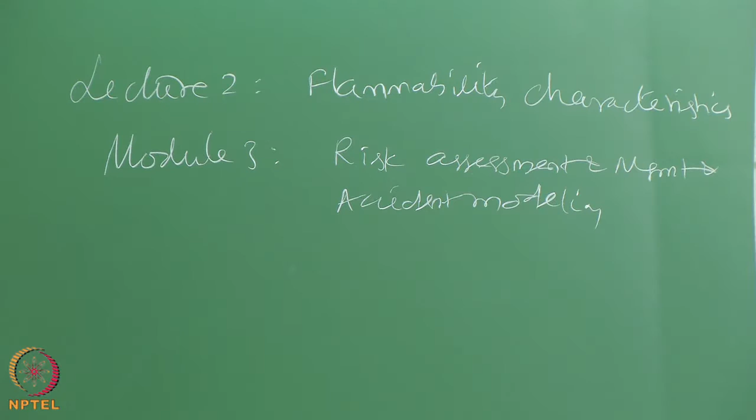We already said a few characteristics are important for understanding the flammability characteristics better. One is what we call auto ignition temperature. The other is what is called the flammability limits.

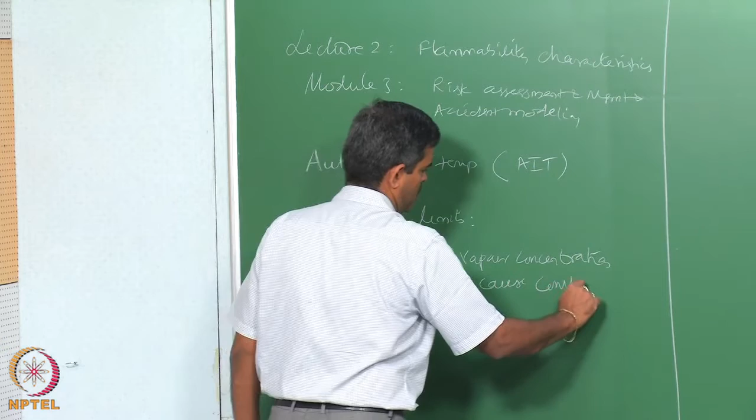Let us talk about the flammability characteristics in detail, in which the foremost thing is the flammability limit. Flammability limit actually is a range of vapor concentration. It is a range which could cause combustion in the presence of an ignition source.

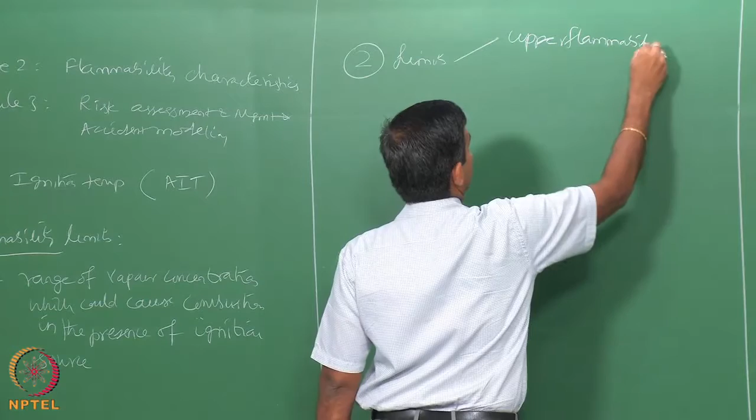Essentially, there are two limits. One is what we call upper flammability limit, which is UFL. Other is lower flammability limit, which is LFL.

LFL actually is a limit below which the mixture will not burn. What could be the reason for this? The reason is the mixture is too lean, so it cannot cause ignition.

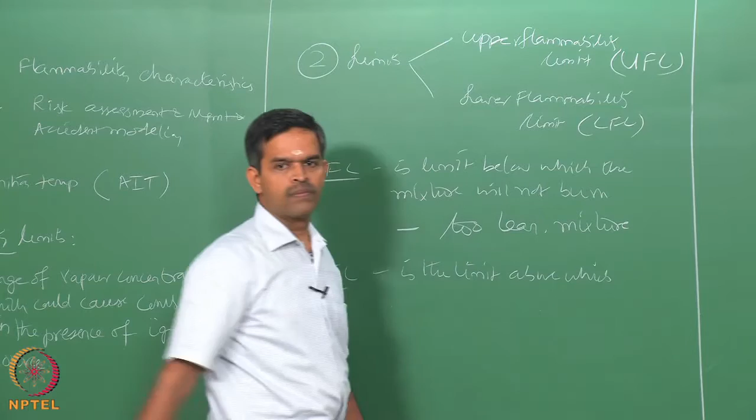Upper flammability limit is the limit above which the mixture will not catch fire. The reason is the mixture is too rich.

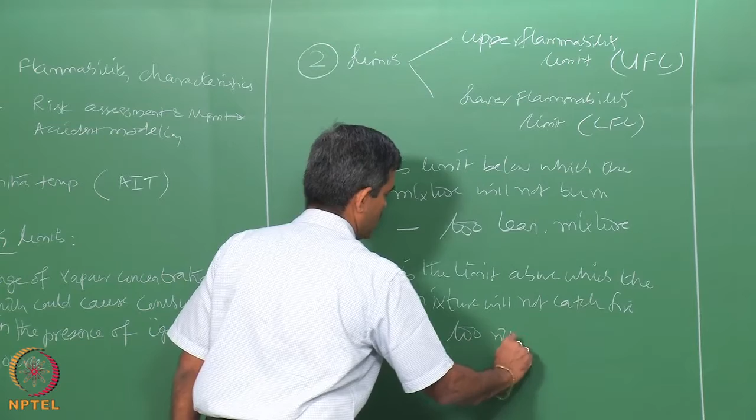So, essentially flammability limits is actually the range between UFL and LFL, because it is that region between which a mixture can catch fire.

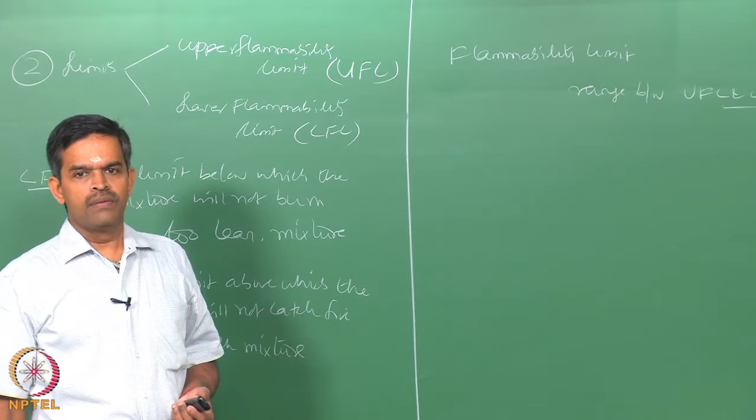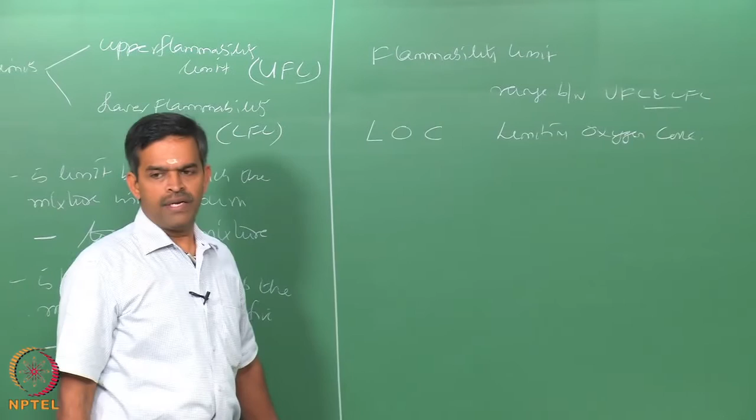The next property could be, interestingly, limiting oxygen concentration. It is the minimum oxygen concentration, defined as the minimum oxygen concentration below which combustion is not possible. To activate combustion, you actually need a minimum O2 presence.

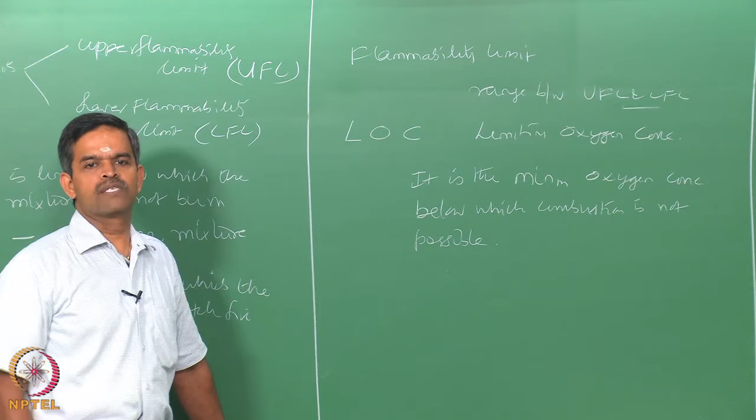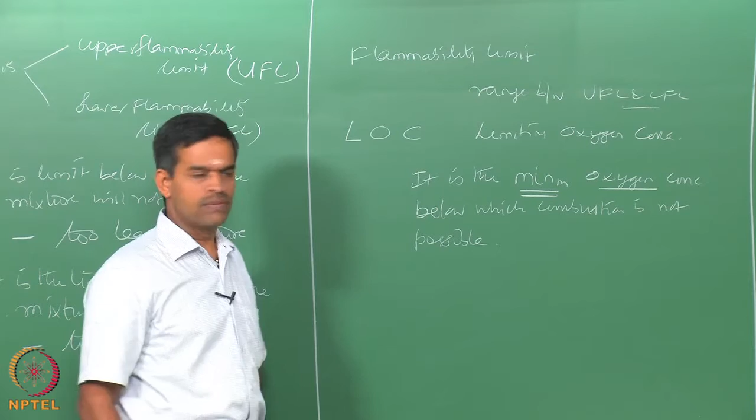If the oxygen concentration is below a minimum required value, the mixture may not catch fire even in the presence of an ignition source. Generally, this is expressed as volume percentage of oxygen.

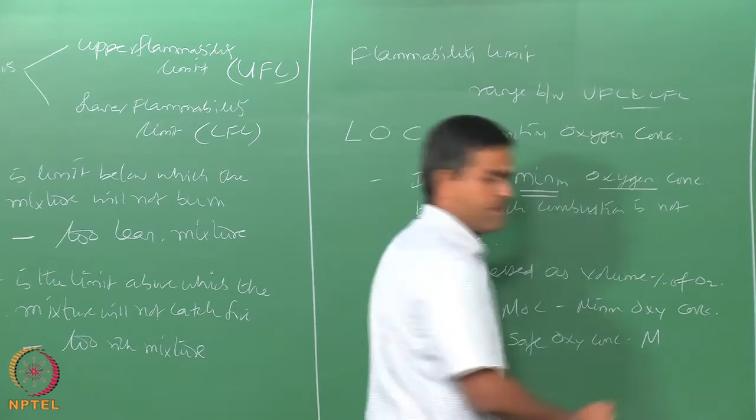Sometimes it is also called MOC, that is minimum oxygen concentration. It is also sometimes called maximum safe oxygen concentration, which is MSOC. So, LOC can be referred as MOC or MSOC. It is actually the minimum oxygen concentration required for a mixture to catch fire.

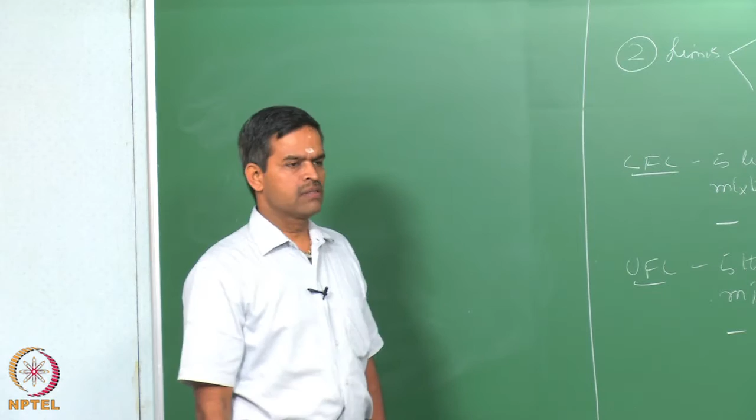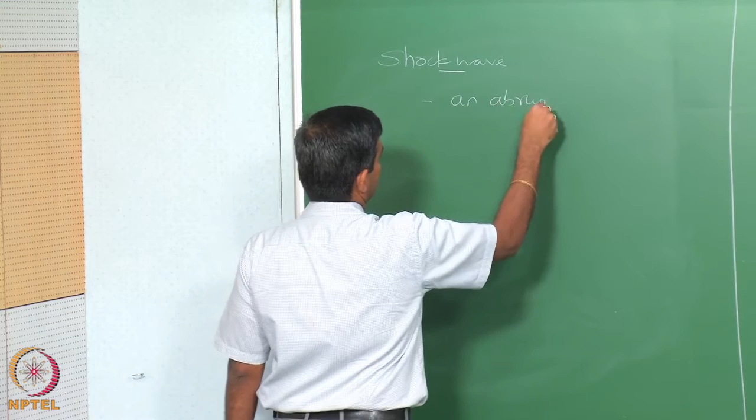As we said earlier, the important consequence or effect of an explosion release is it can result in a shock wave. Let us see what is called a shock wave. A shock wave actually is an outcome of an abrupt pressure wave moving through a medium.

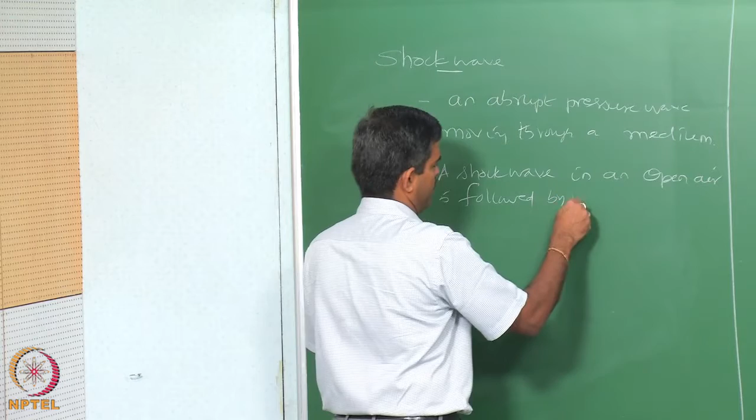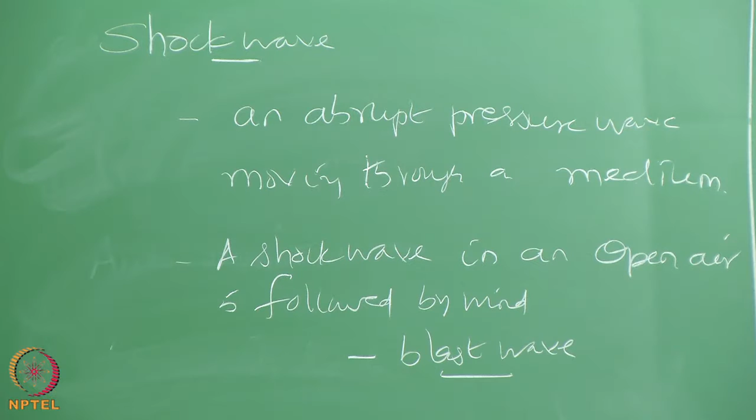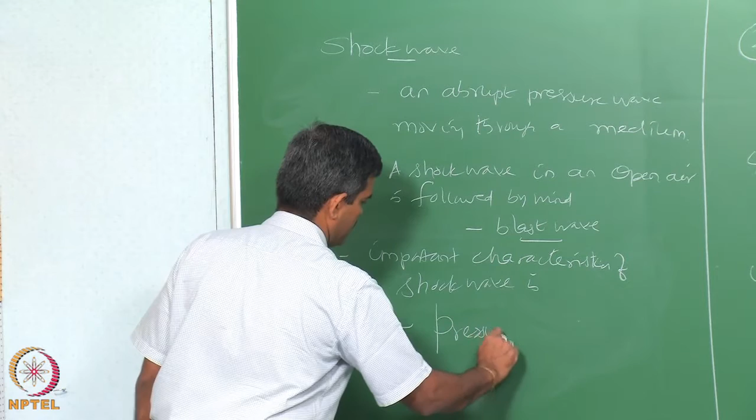One of the important vital characteristics of a shock wave is that the pressure increase in a shock wave is so rapid that the process is almost adiabatic.

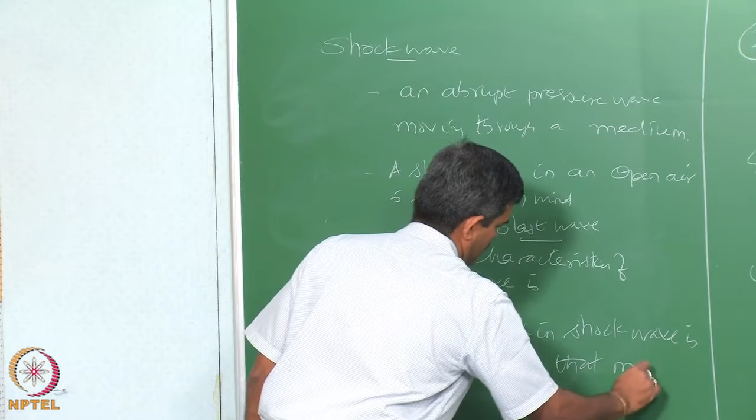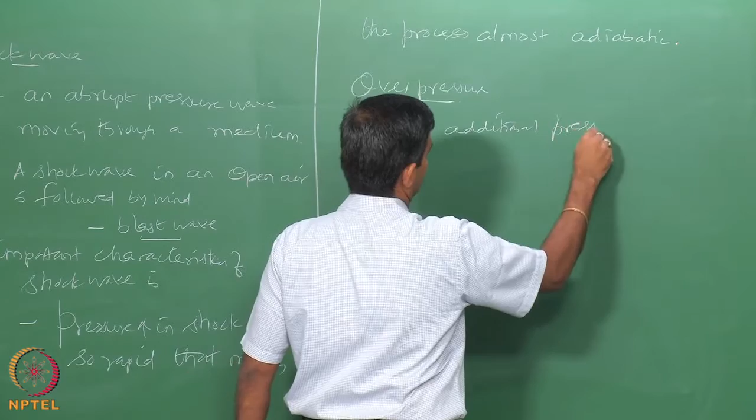There is another important consequence which comes from explosion, what we call overpressure. Overpressure is nothing but an additional pressure imparted on an object by a shock wave.

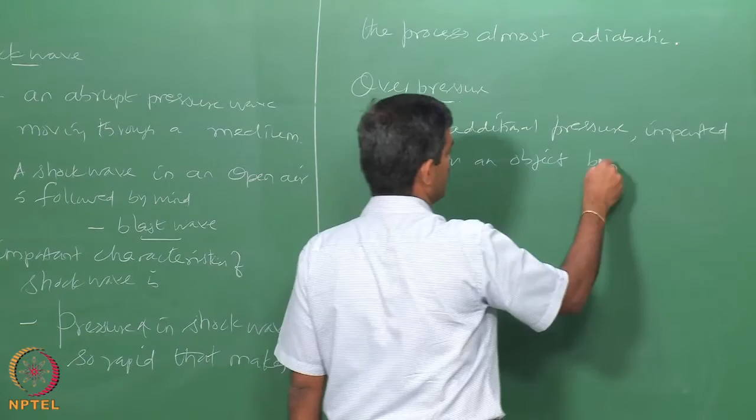Interestingly, as the temperature increases, the upper flammability limit keeps on increasing and the lower flammability limit keeps on decreasing from the original value, and that increases the range of flammability, because flammability is actually the range within which it can catch fire. As the temperature increases, you will obviously see the range of a mixture which can catch fire is widened or increased.

However, the gas or liquid will remain non-flammable above the upper flammable limit and again non-flammable below the lower flammability limit. It is at that temperature which auto ignition is required, meaning the mixture will not require any external ignition source to catch fire. So, it is that temperature which is indicated as auto ignition, which completely lies within the flammable limits of any given mixture.

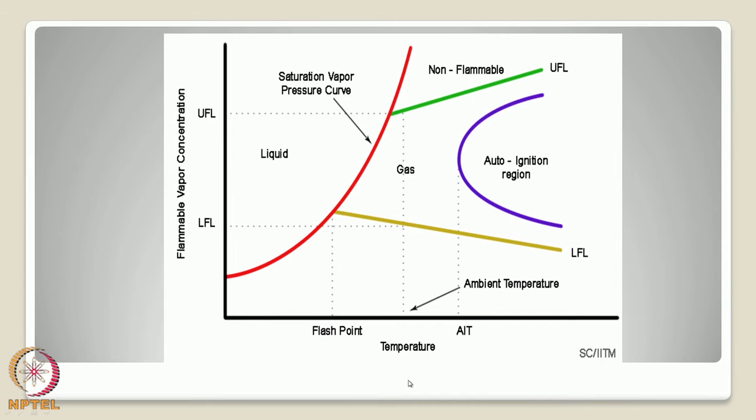We have also seen the flash point, which is an important flammable characteristic of any given mixture, now put together in all terms in a single graph, as you can see from the curve. Let us talk about flammability of liquids, the characteristics of liquids.

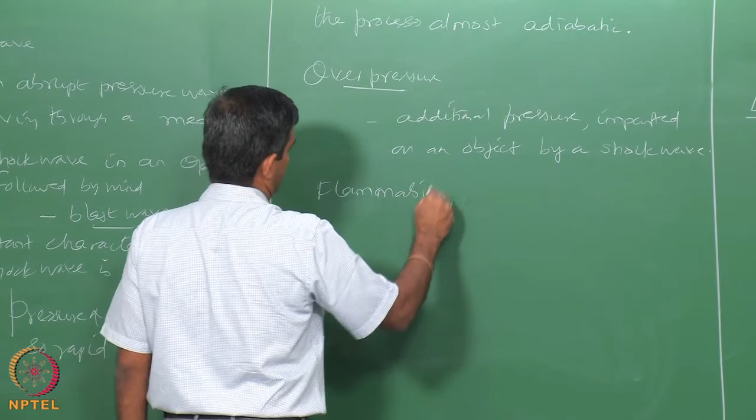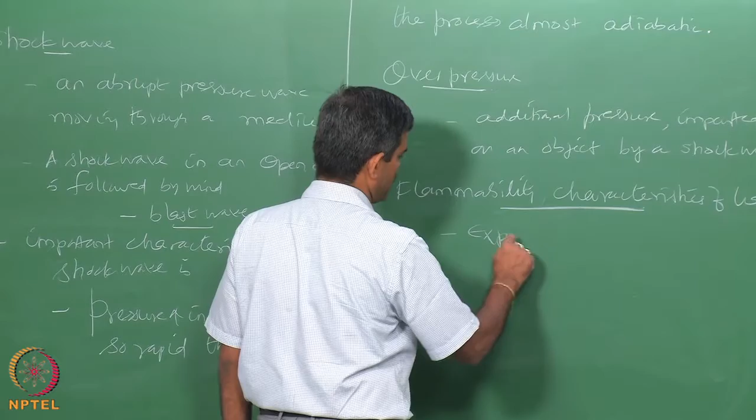The flammability characteristics of liquid are experimentally determined by a setup called open cup method. They are generally determined experimentally by open cup method. However, the flammability characteristic of liquid can also be expressed using an analytical relationship, which I will write now.

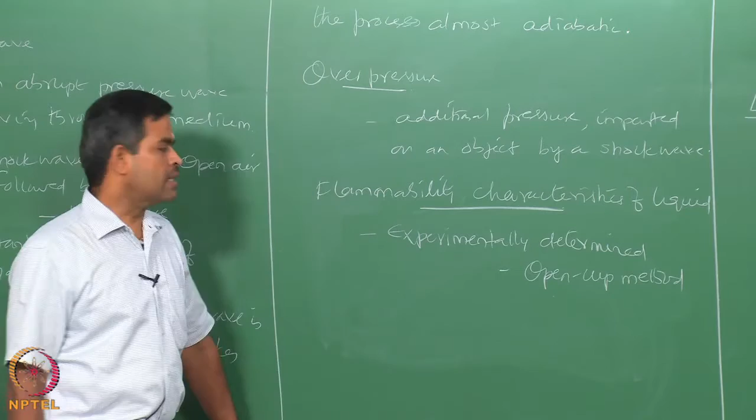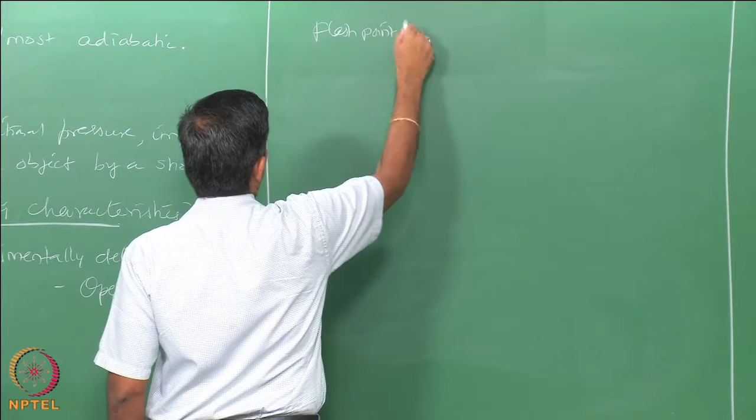If you know the constants A, B and C, the flash point temperature Tf can be computed for a given liquid, for any liquid, if the boiling point is known.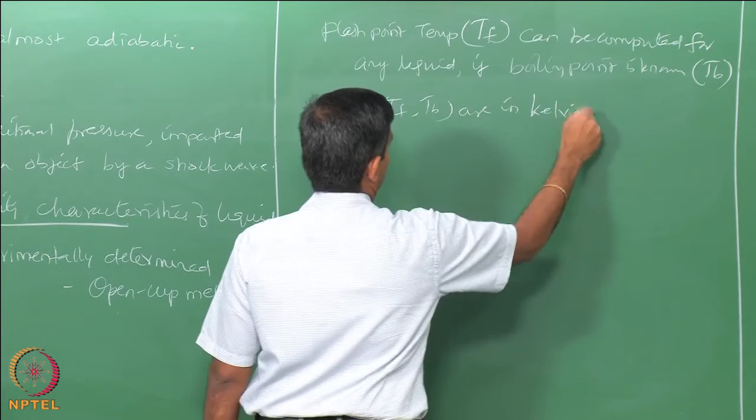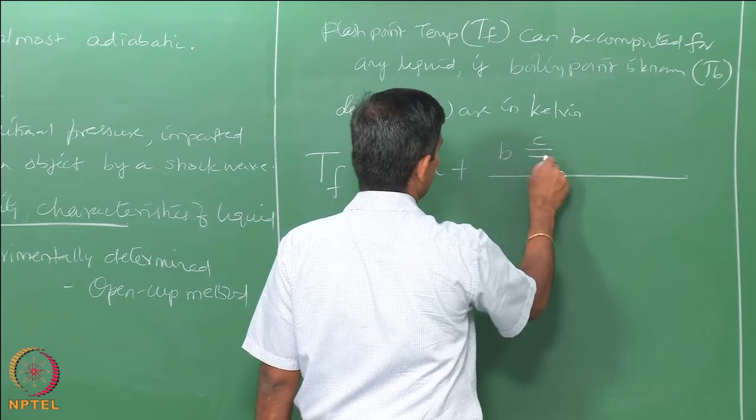Let us say both the temperatures are in kelvins, then flash point temperature of a liquid is simply given by A plus B into C by Tb, the boiling point, exponential to the power of minus C by Tb, divided by 1 minus exponential to the power of minus C by Tb, the whole square - equation 1.

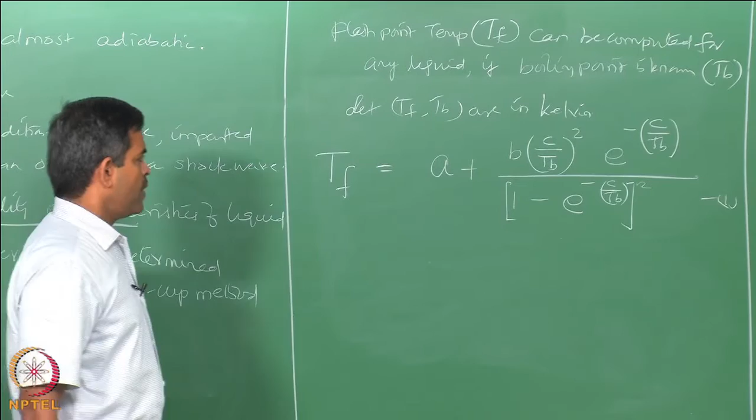If I know the boiling point of the liquid, I can easily estimate the flash point if I know the constants A, B and C in this empirical equation. So, for different chemicals, these constants A, B and C, which are used to estimate the flammability characteristic of a given liquid, can be easily found in the literature.

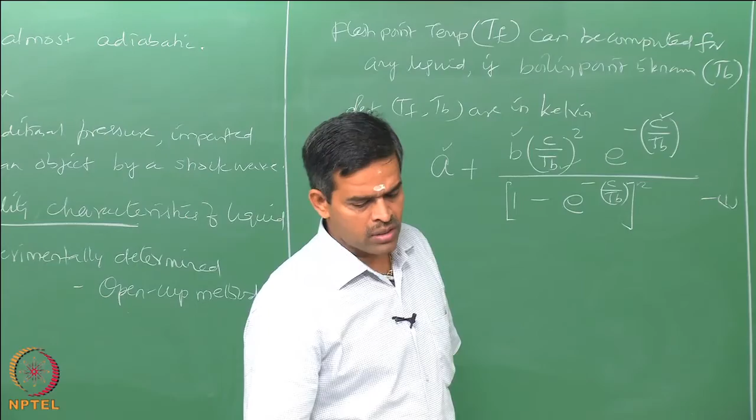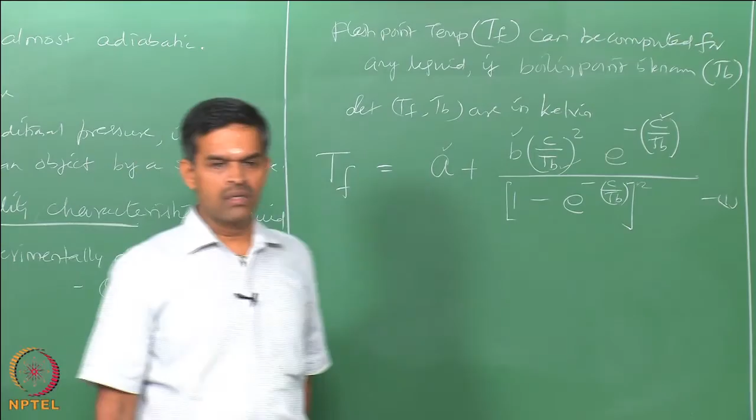So the constants A, B and C are available. Substituting them and knowing the boiling point temperature of the liquid in Kelvin, one can find the flash point temperature of the liquid in Kelvin again, and once you know the flash point, one can easily find the upper and lower flammability limits or characteristics using the open cup method, which can be easily estimated.

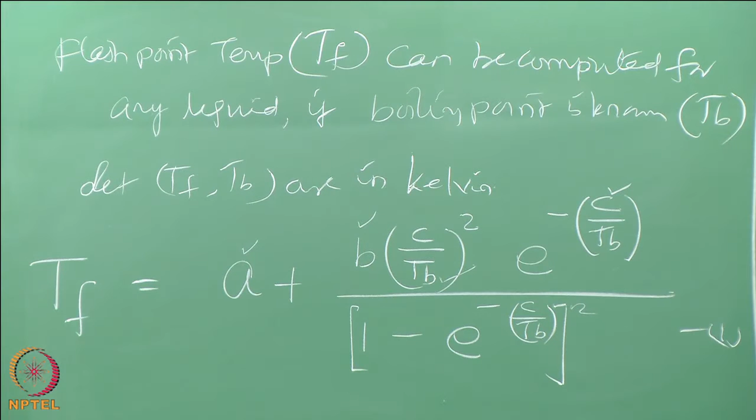Let us talk about flammability characteristics of vapor and gases.

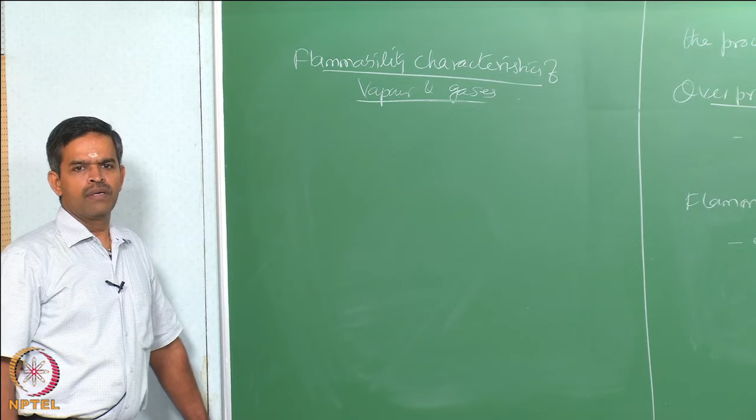The flammability limits of vapor can also be experimentally determined in a closed vessel apparatus. So, they can be experimentally determined using a closed vessel apparatus.

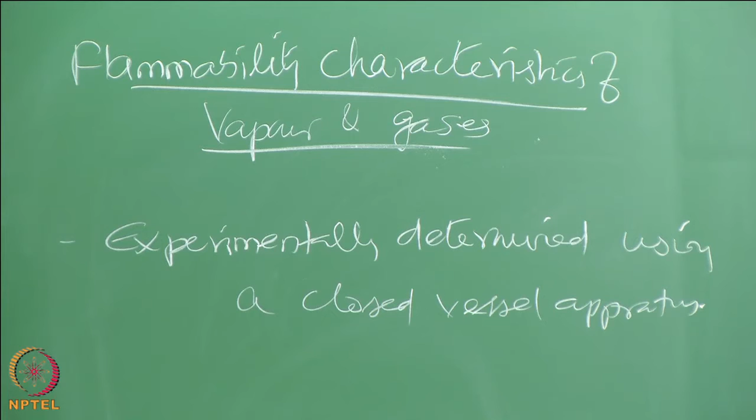Alternatively, one can also find the flammability limits of a mixture of gas and vapor using the Le Chatelier relationship.

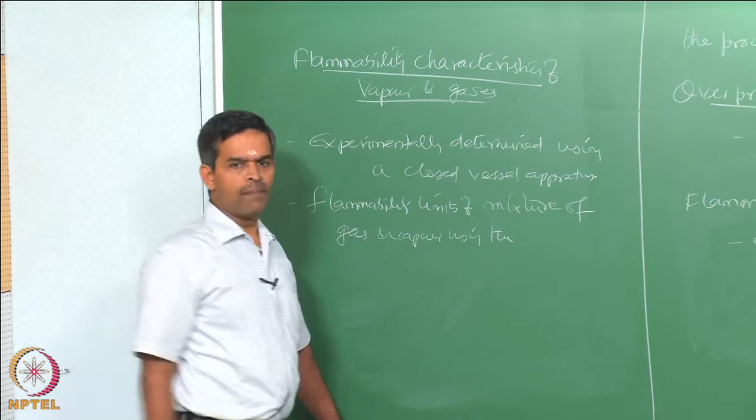The lower flammability limit of the mixture of vapor and gas can be simply given by 1 by sum of yi by LFL of i, and i is the sum here - equation number 2.

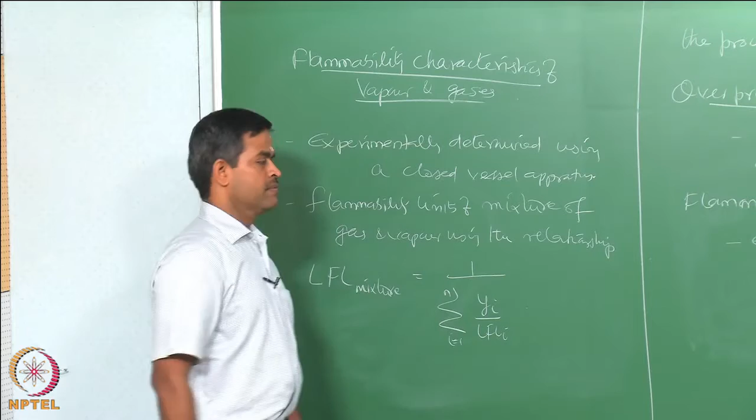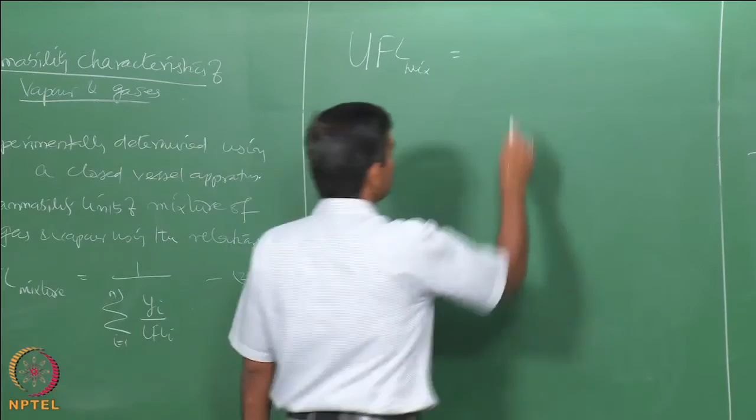Upper flammability limit of the mixture can again be given by the same equation, of course substituted with yi by UFL of i, varying from 1 to n, where n is the number of gases or vapors considered for the analysis.

So LFL i is the lower flammability limit of the ith component in the mixture, in terms of volume percentage. yi is actually the mole fraction of the ith component on a combustible basis. n is the number of combustible species considered for the summation.

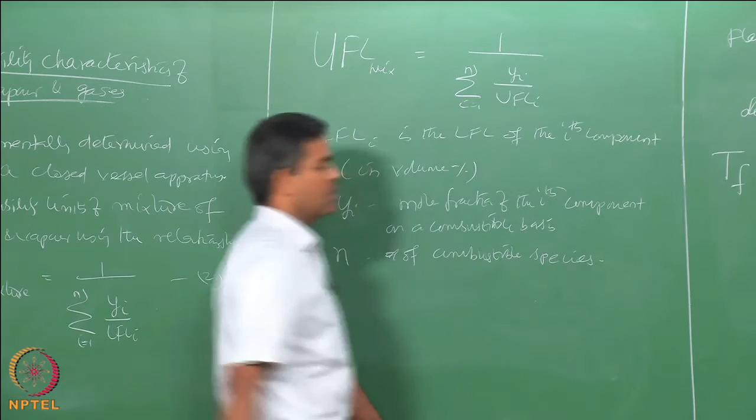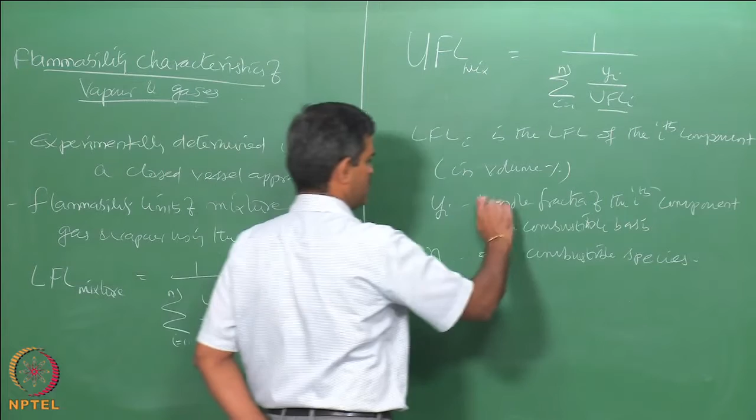So if you know the LFL and UFL of the ith components present in a given system, and if you know their mole fraction on the combustible basis, one can easily find the LFL and UFL of the complete mixture, or the limits of a given mixture, which is a mixture of gas and vapor.

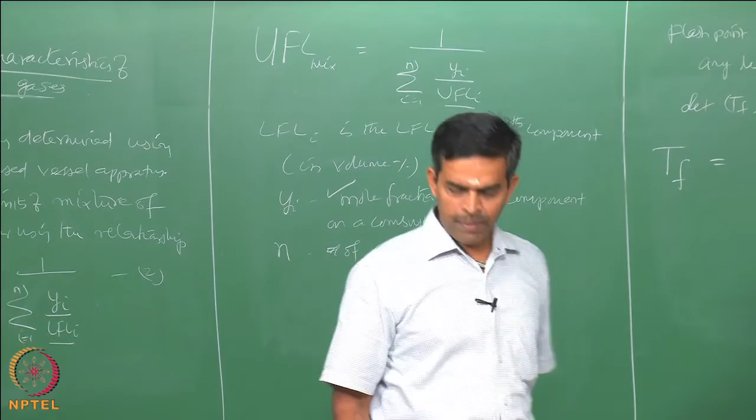Subsequently, the flammability limit behavior depends on both temperature and pressure.

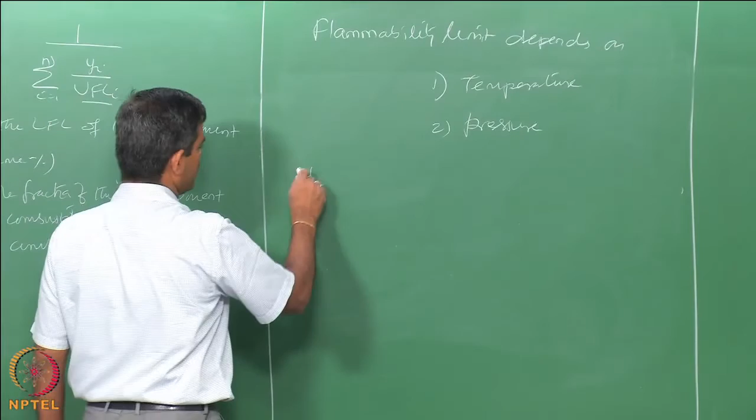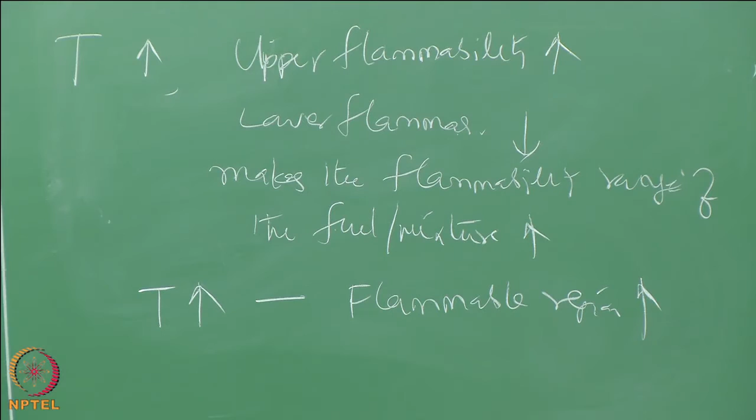When the temperature increases, upper flammability increases, while lower flammability decreases, which makes the flammable range of the fuel or the mixture more. So, increase in temperature will increase the flammable region more. This increases the flammable region or range, one can say flammable range.

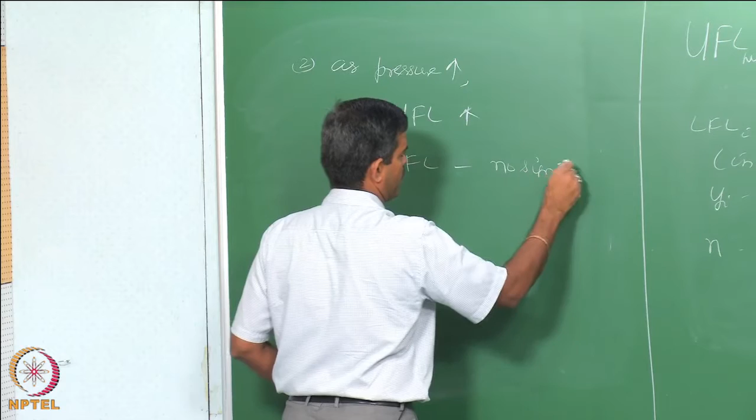Coming to pressure, as pressure increases, upper limit increases, whereas pressure has no significance on lower flammability limit at all.

Therefore, the relationship of upper flammability limit with pressure can be given by a simple equation: upper flammability limit with pressure can simply be given as upper flammability limit plus 20.6 (log P plus 1), where P is the absolute pressure in, let us say, megapascal.

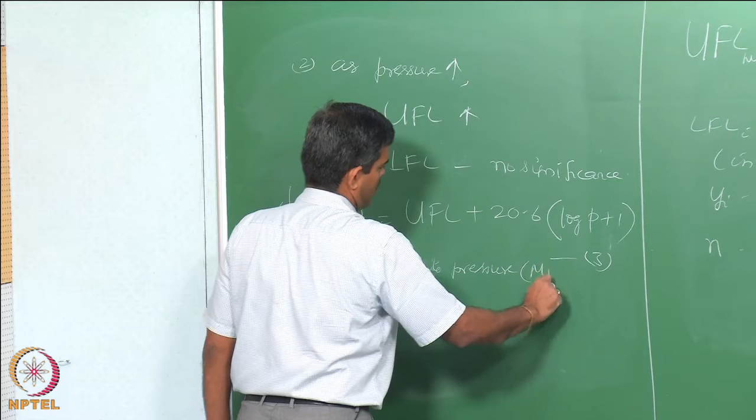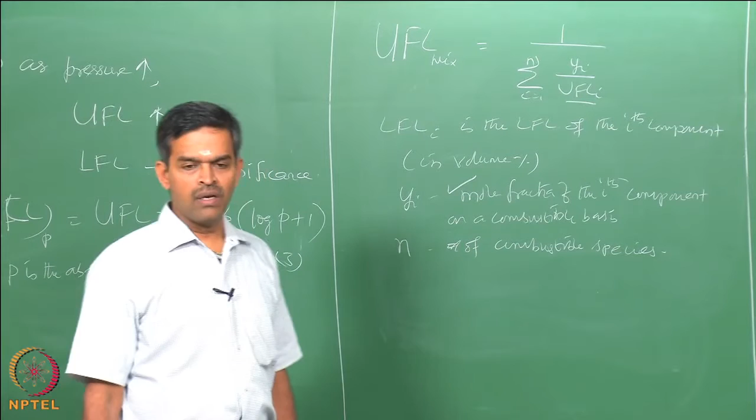We have now agreed that to estimate the flammability characteristics, or probability of catching fire for a given mixture, depends on the upper and lower flammability ranges, limiting oxygen concentration, and autoignition temperature. There are various characteristics based on which one can estimate the probability that a given mixture of gas, vapor, or liquid can catch fire. One can also estimate the flammability limits using stoichiometric balance.

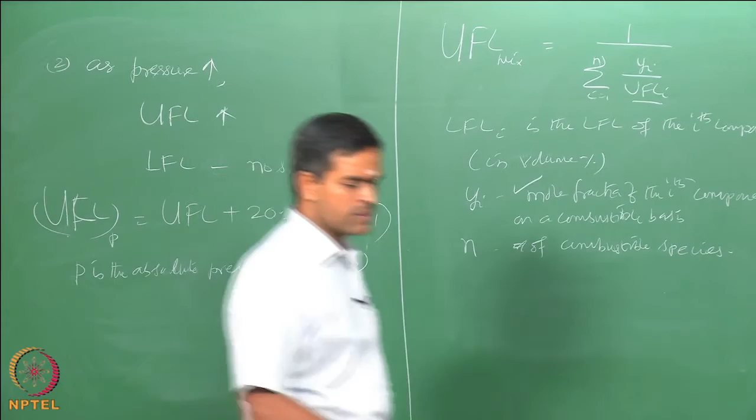Flammability limits can also be estimated using stoichiometric balance. Now, for many hydrocarbons, in general, the LFL and UFL, the lower flammability and upper flammability limits, are essentially functions of stoichiometric concentration, what we call as CST of the fuel.

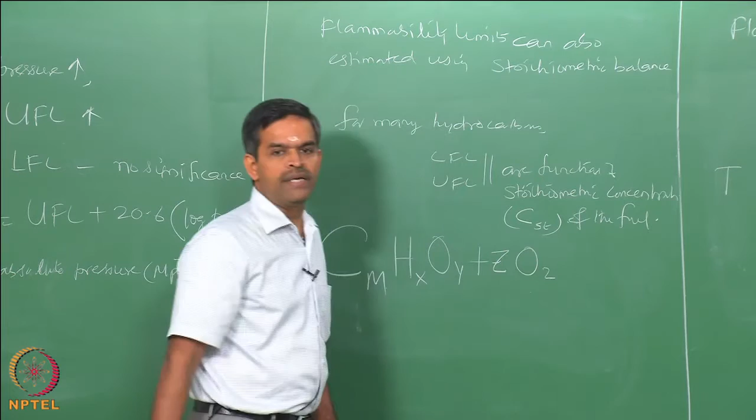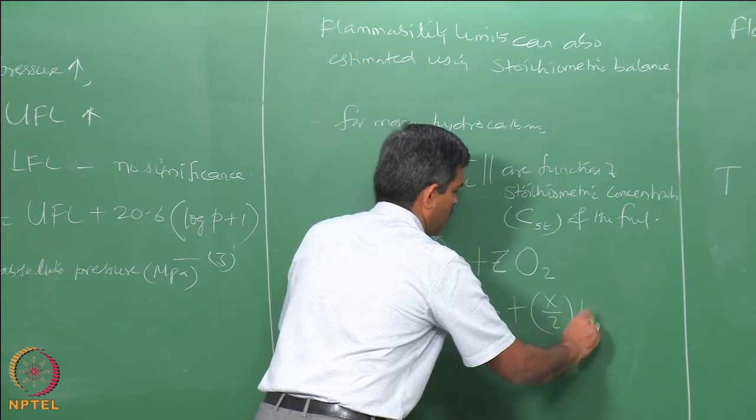Let us look at a general equation useful in computing this relationship. Let us say Cm hydrocarbon, H with concentration X, and oxygen with concentration Y, plus oxygen concentration in terms of Z, will give me carbon dioxide plus X by 2 concentration of water. That is a general stoichiometric relationship indicating the combustion reaction.

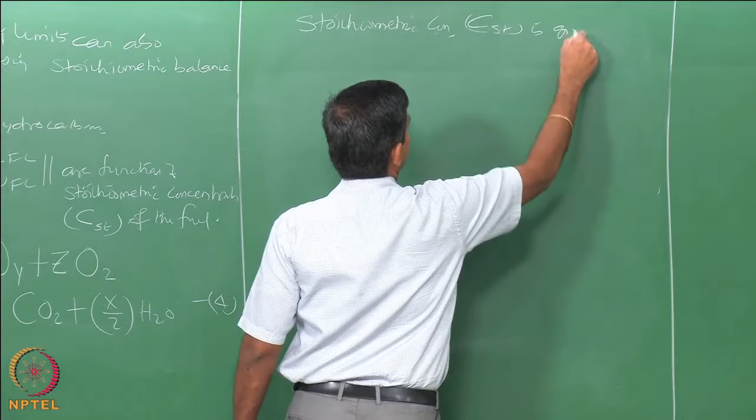In that case, the stoichiometric concentration is given by 21% by (0.21 plus the Z value). Z can be calculated where Z will be m plus 1/4 of x minus half of y.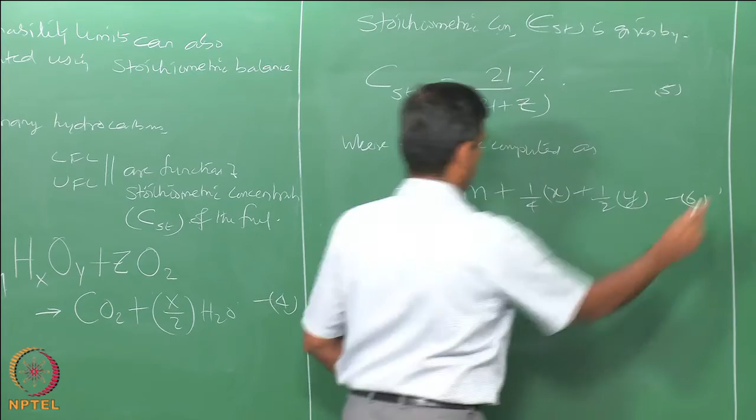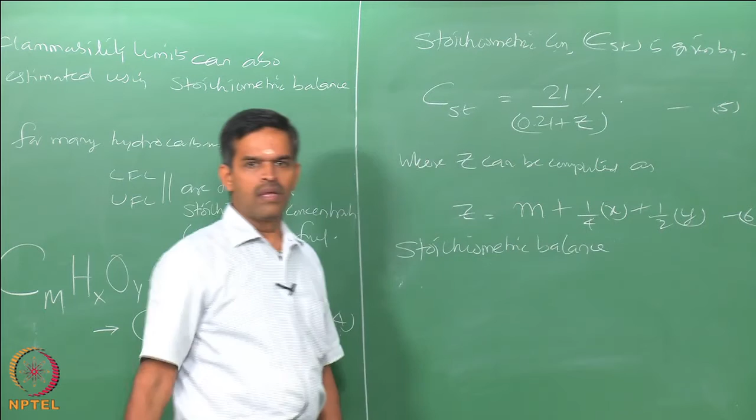We have something called stoichiometric balance. Stoichiometric balance gives the relationship between the quantities of substances involved in a chemical or combustion reaction.

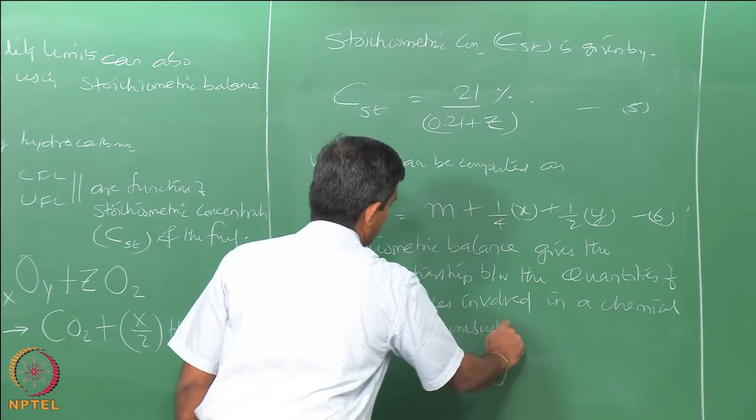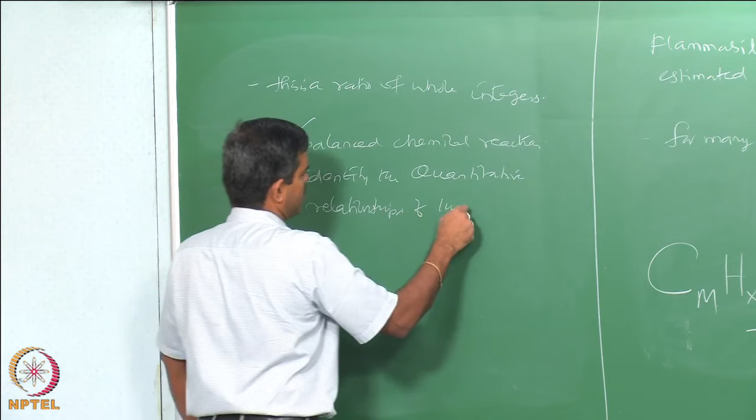This is typically a ratio of whole integers, which includes the calculation of the quantitative relationship of the reactants and the products of a balanced chemical reaction. So you need to have a balanced chemical reaction, from which one can identify the quantitative relationships of the reactants and the products.

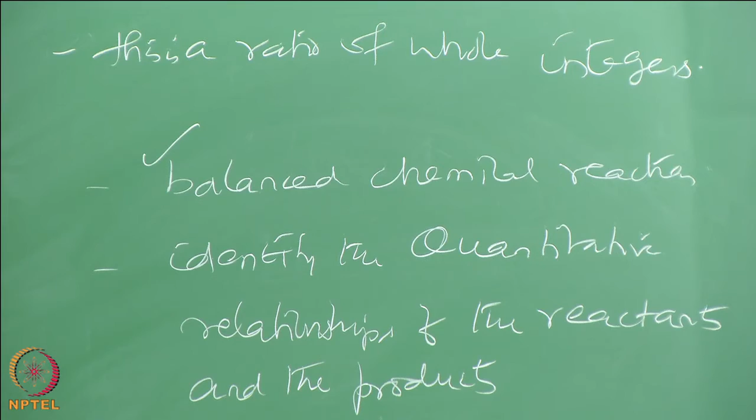Based on this, one can easily find the stoichiometric concentration. Let us say LFL, the lower flammability limit, can be given by 55 by (4.7m plus 1.19x minus 2.38y plus 1), whereas the upper flammability limit can be given by 350 by (4.7m plus 1.19x minus 2.38y plus 1). That is equation number 7.

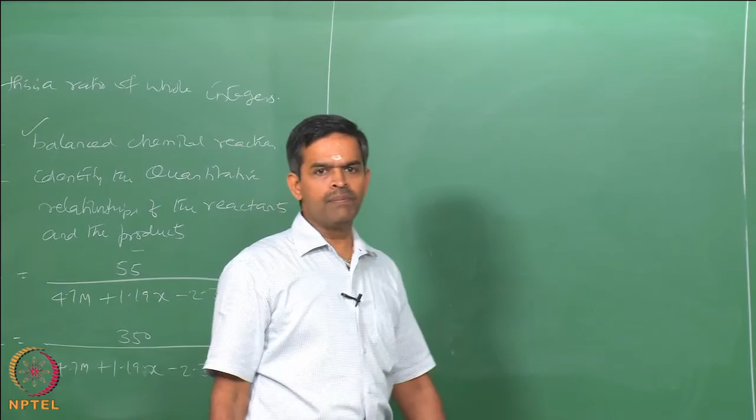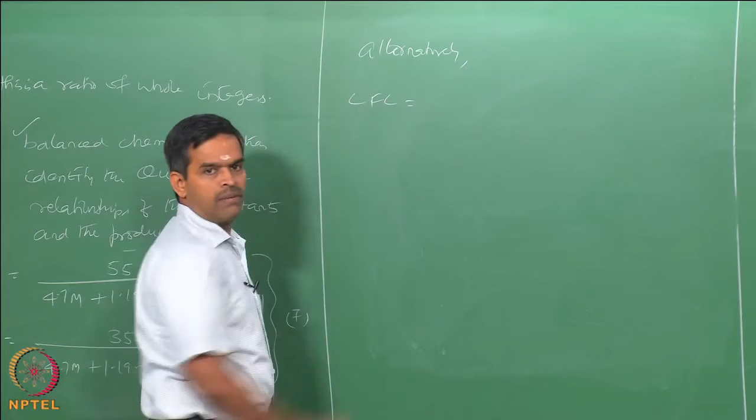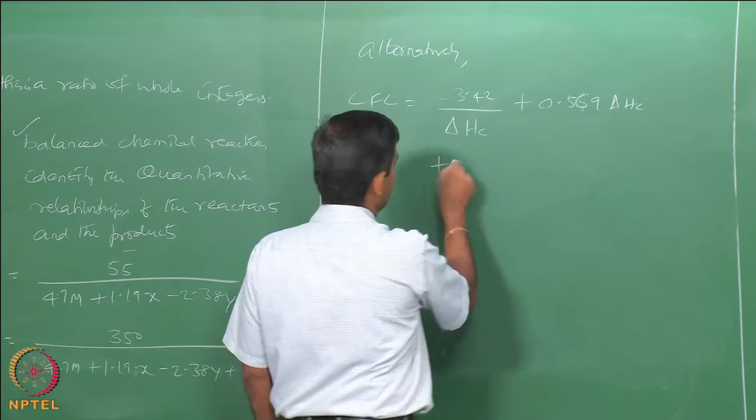Alternatively, flammability limits can also be computed using another equation. LFL can be given by minus 3.42 by delta Hc plus 0.569 delta Hc plus 0.0538 delta Hc square plus 1.8, and the upper flammability limit can be estimated as 6.30 delta Hc plus 0.567 delta Hc square plus 23.5, equation number 8.

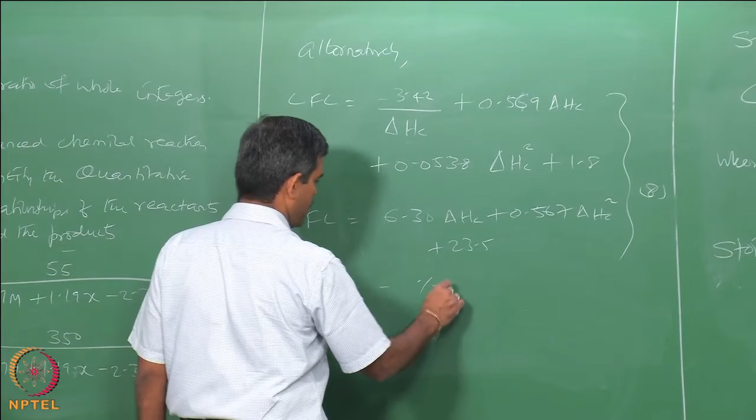One can also estimate the limiting oxygen concentration, LOC, which has units of percentage of moles of oxygen in the total moles. For hydrocarbons, LOC is actually estimated using the stoichiometric relationship of the combustion reaction, which can be given simply as LOC approximately equal to Z times LFL. That is equation number 8.

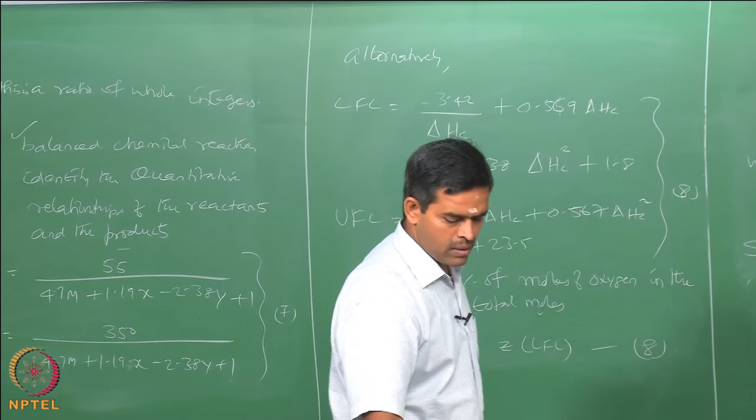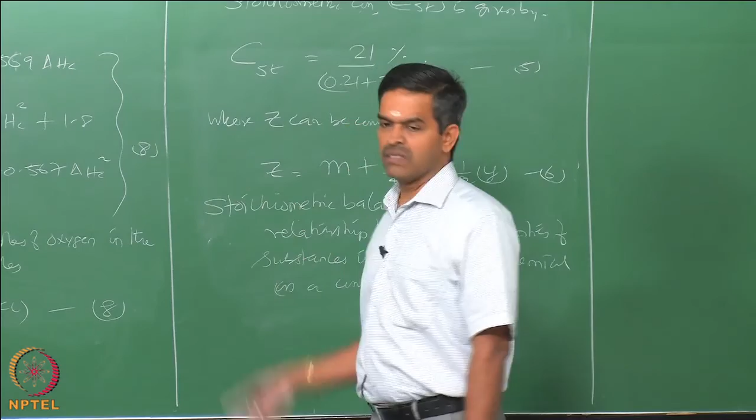So friends, in this lecture we discussed the flammability characteristics of liquid, gas, and vapor. We understood the importance of lower and upper flammability limits of a given mixture or liquid, and how these characteristics vary with increase in temperature and pressure. We understood the range of flammability responsible for estimating the probability of fire in a given situation when all three arms of a fire triangle are inherently present in a process system. We also understood various methods and empirical equations based on which the lower and upper flammability limits of a liquid, vapor, or mixture can be computed.

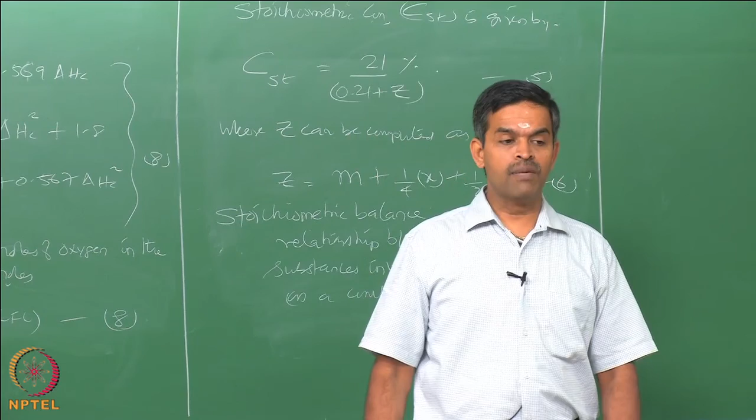In the next lecture, we will discuss further about stoichiometric balance and how to draw a flammability diagram in detail, if you know the flammability characteristics of a given liquid, mixture, or hydrocarbon based upon the stoichiometric balanced equation. Thank you very much.